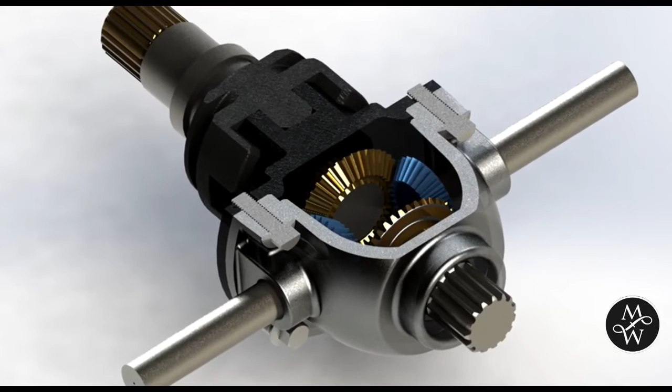In this one we are going to build the second cover, which will be fixed to the first cover using some bolts and screws on the assembly. So this is the picture of the second cover and this is how it looks in the differential gearbox.

So let's begin by creating a new file, a part design. You're free to select any plane you want. I'm going to select the front plane and let's begin our sketching. I'm going to change the view first. Click on the sketch.

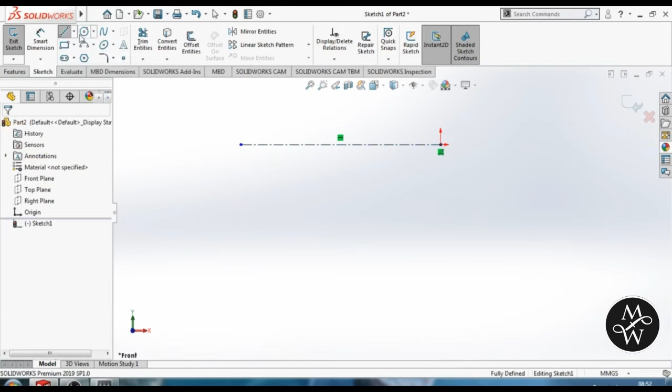So the feature that we are going to use to build our form of the second cover is the revolution. The hard thing about the revolution is the sketch. The sketch is really detailed with a lot of dimensions, so we will focus on that to get the exact dimensions that we need on the second cover. So first let's create some center lines. The first one should be horizontal, second one should be vertical. Good. The dimension here of this center line is 31.5.

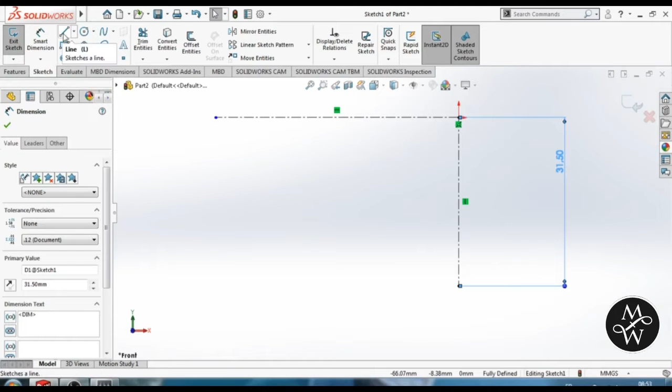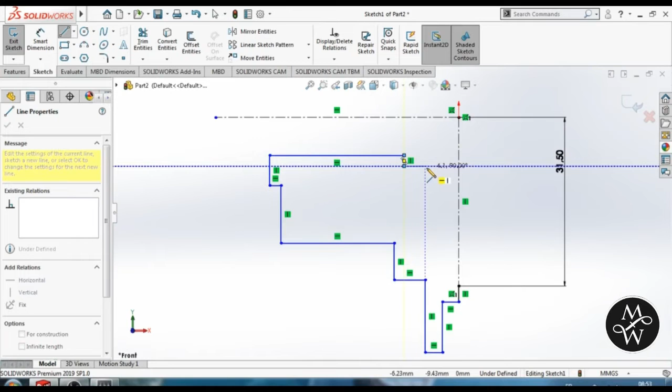So first I'm going to create the lines that we need, and after that I will start the full dimensioning. So follow me on this line creation, and after that we will dimension our form. So let's go. Perfect, now we have the form, so let's start the dimensioning. Here we have 2.5. Here we have 3.5.

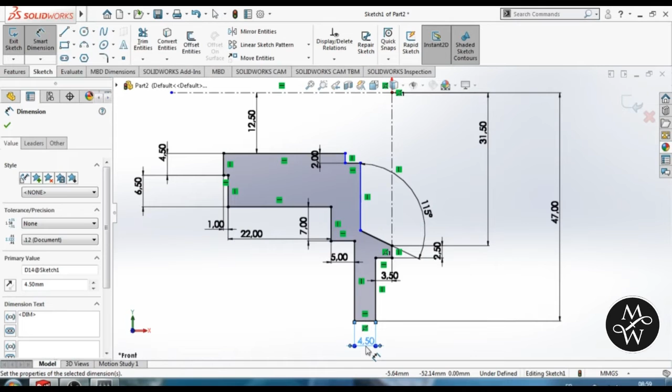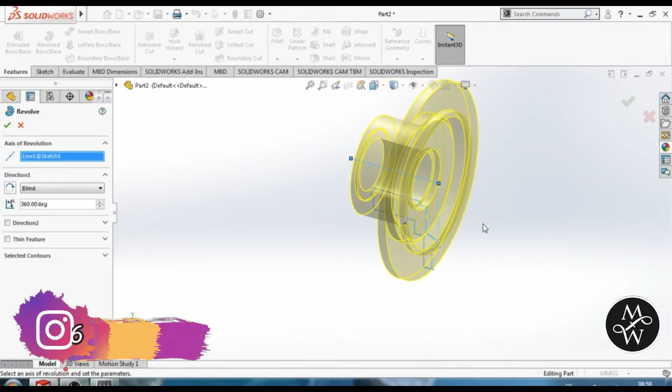Good, now we have the full dimensioning that we need for the form, so now we can exit the sketch and use the feature that we need. The feature that we are going to use is the revolve base. The axis of revolution should be this one. Nice. Click OK, and here we have the form that we need.

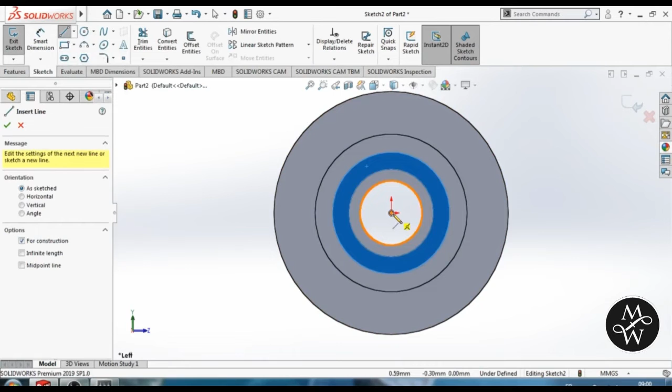Select this face and change the view, the other one, and let's begin our sketching. Click on the sketch. I'm going to add 3 center lines here. The first one should be on this axis. The second one should be inclined like that, and the third one as well.

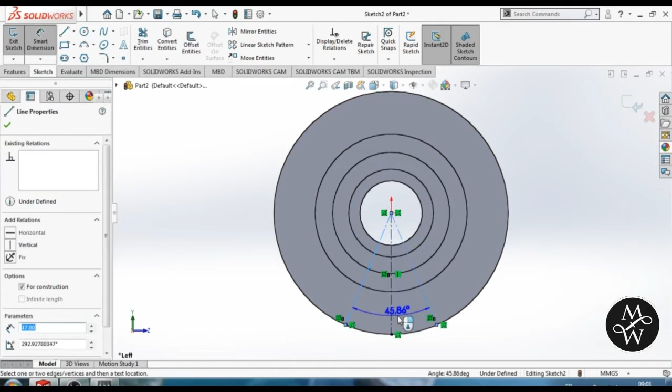Now I need to add a relation between these two center lines, and I need them to be symmetric. So I will not select the full center line, but I'm going to select the last point of the center line and the last point of the other center line, and then click on the mid center line and add the relation symmetric. Good. And now the angle between this center line and this one is 35.28.

Now I'm going to need some 3-point arcs. So let's click on the 3-point arc. The first point of the 3-point arc is this one. Make sure the white icon appears next to the pencil. It means that you choose the intersection between the center line and this one, and then click on it. Click on the other one. Always make sure you have the white icon, and then the third point should be on this circle.

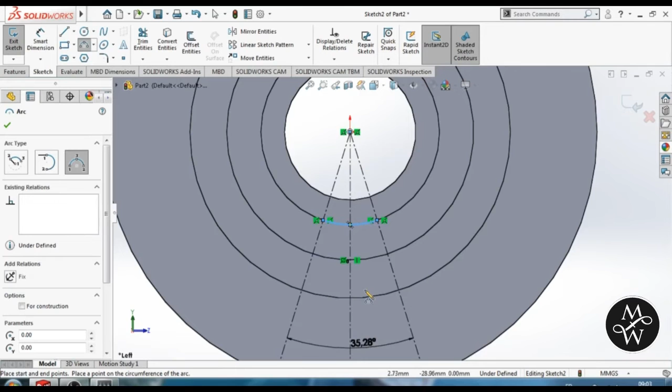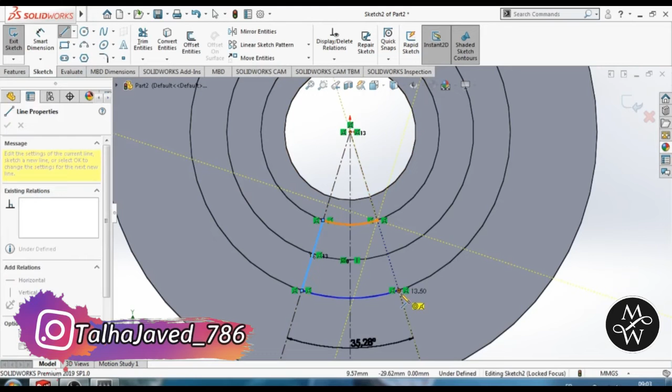Good. We need another 3-point arc, so I'm going to select here. I'm going to select the other one. Always make sure you have the white icon, and the third point should be on this circle. Now I will add some lines between this one and this point. The second line should be between this point and this one. And now we have the sketch that we need. Click OK and then exit the sketch.

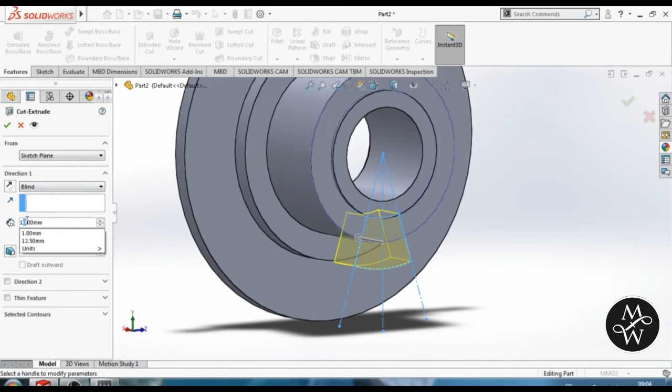Now we will use the cut extrude feature. So let's click on the extruded cut feature. Let's put it on blind, and the depth is 13. Good. Now we have the form of the teeth. The next thing that we need is the hole.

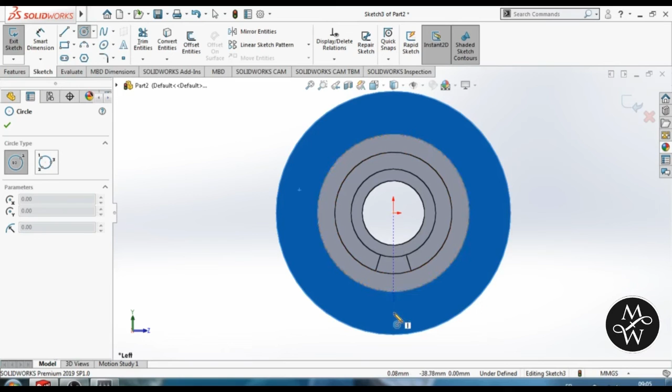So to create the hole, let's select this face, change the view, go to the sketch, and create a circle. Make sure the circle is on this axis. The distance between the center of this circle and the big center is 40.5. If you remember, it's the same dimensioning as the hole on the cover. The dimension of this circle should be 6.

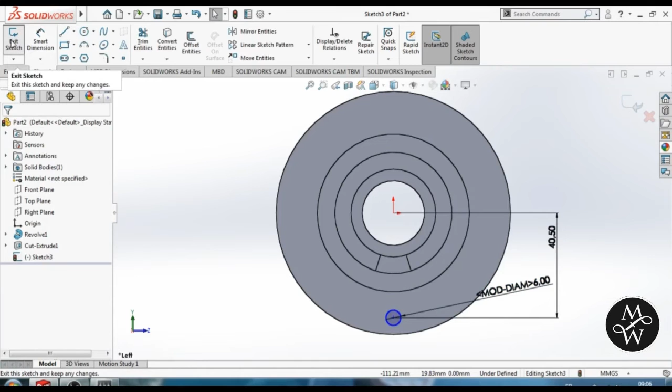Now we can exit the sketch, and let's go for an extruded cut. Let's make it through all. Click OK, and now we have the hole.

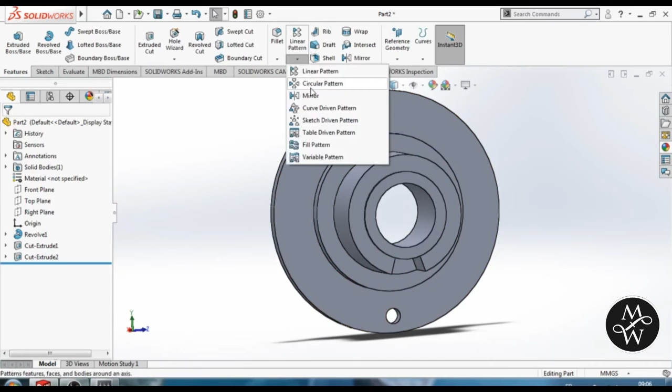What I'm going to do now is repeat this cut extrude and this one around the cover. So the feature that we are going to use is the circular pattern, and let's select the first cut extrude and second. The instances that we need are 6. Make sure it's equal spacing. The direction should be this edge. Click OK. Good. Now we have the form of the second cover.

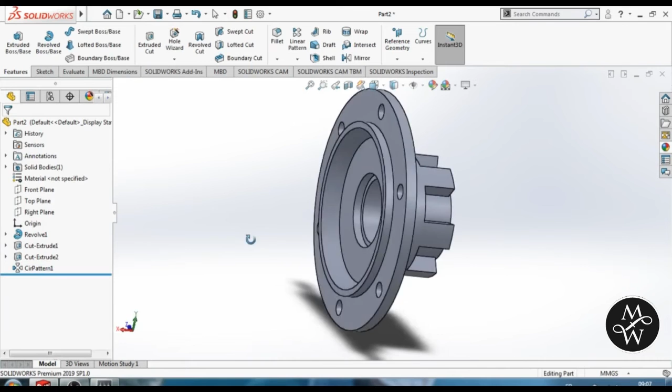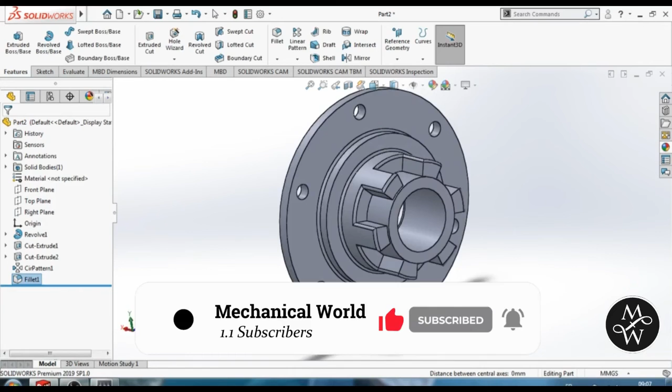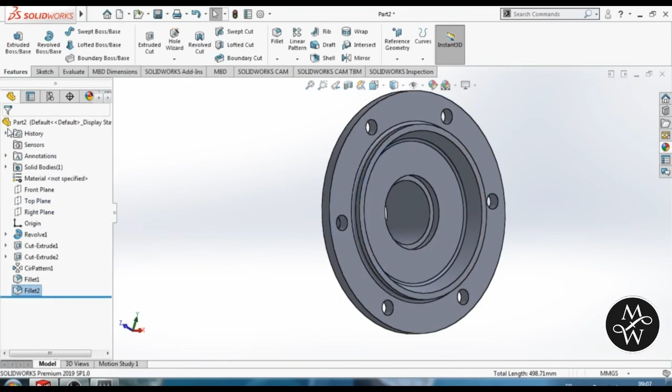All we need now are some fillets. Let's select this face and this edge. Go to fillet, and let's make it 1 mm radius. Now I'm going to select this edge. Let's rotate this one. I'm going to select this edge and this one, and let's add a fillet of 1.25. Perfect. And now we have the full form of our cover.

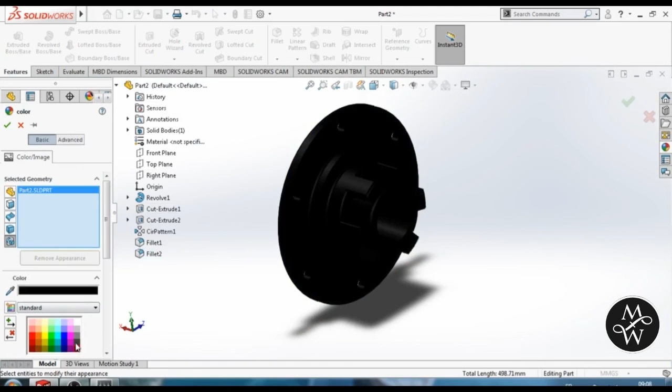So the last thing that we are going to do is to change the color. I'm going to select the whole part. Good. And color, let's make it black, like that. Good. Now we have the second cover ready to use on the assembly. So as you can see, it's not a hard part to do. The only hard thing about this part is the dimensioning on the first sketch. Other than that, everything is easy.

In the next video, I'm going to create the shaft.